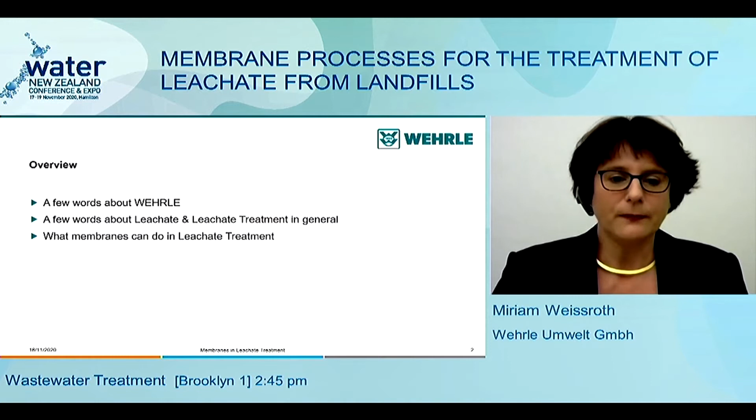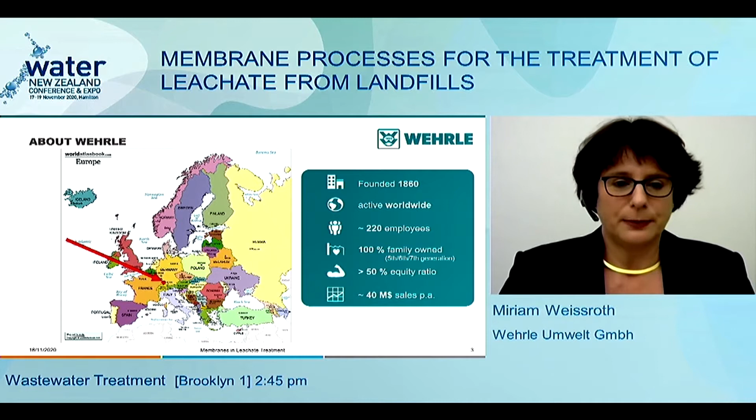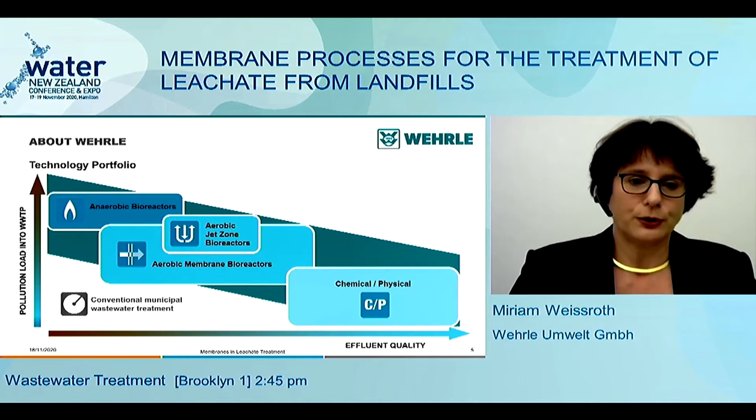WEHRLE is a family-owned company that supplies effluent treatment systems. We are located in the southwest of Germany, very near France, Switzerland, and Austria, and we often work across these countries. We've been around for a very long time and are a pretty small company that has specialized in the treatment of industrial effluents and heavily polluted wastewaters. For our clients, we have a technology portfolio from which we choose and combine different processes to achieve what the client has asked for. We have a good overview of which process technology works where, and we are always on the lookout for new technologies to add to our portfolio.

That's enough about WEHRLE. Now a few words about leachate. Leachate has different origins - you're all aware of leachate coming out of landfills, but there's also leachate from the storage of waste, waste handling, waste transport, and water coming from waste treatment plants is also considered leachate. Consequently, having different origins, we have different compositions, and you see a wide range of COD and TKN values - really heavily polluted stuff that we're talking about.

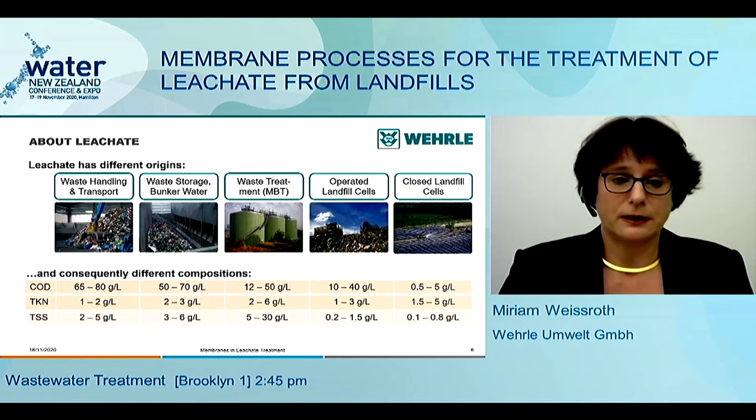But leachate quality doesn't only depend on its origin, it also depends on the type of waste in the landfill - what you and I throw away that ends up on a landfill. It also depends on the waste management strategies a region, country, or continent has: do we deposit fresh waste or pre-treated waste, do we separate it before landfilling? There are many more factors influencing leachate quality, such as seasonal changes - is it hot and dry, do we have a lot of rain - and aging processes in the landfill itself. So we have many factors influencing leachate quality, and they superimpose each other.

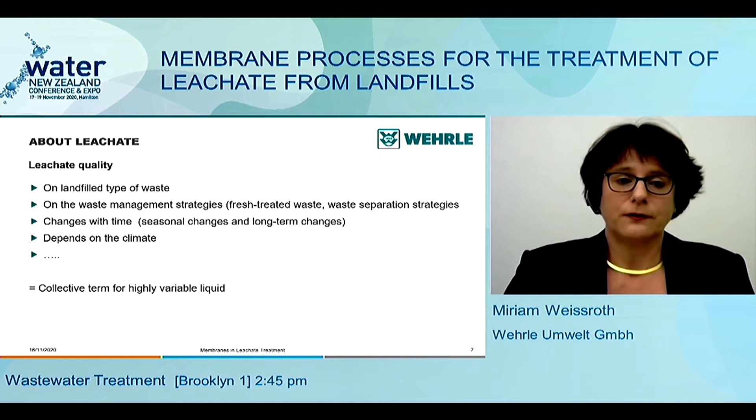So you could rather say that leachate is a collective term for a variety of highly variable liquids. Now, when we talk about leachate treatment, we of course have to look at the treatment targets, and they vary from site to site. But I would like to point out that looking back, we see a great evolution in treatment targets.

It all started in the 70s, when they only looked at COD and ammonia, measured in grams or milligrams. Then people became aware that there is a lot of harmful stuff coming out of a landfill, and more parameters were monitored, such as heavy metals, AOX, or polycyclic aromatic hydrocarbons. Today we are looking at PFAS and BPA, and we have reached a level where we measure substances in micrograms per liter or nanograms.

And of course, that has an impact on the processes that we need to treat the leachates. I would like to point out that today we also look at salt removal. That is something that was not looked at in former times, so it's fairly recent that we find salt removal requisitions.

But when we look at leachate treatment, we have to look at the local conditions. What do we find at the site, and what budget do we have? Is chemical supply sufficient, power supply sufficient? Do we have personnel, etc.?

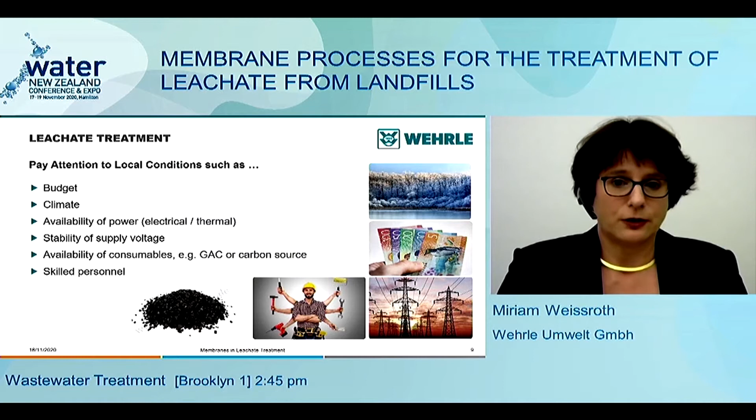And last but not least, we have to consider what's the hydraulic volume that needs to be treated. It ranges from very tiny to very large, and naturally you wouldn't like to treat 5,000 cubes per day using evaporation. I presume, at least, you wouldn't like to.

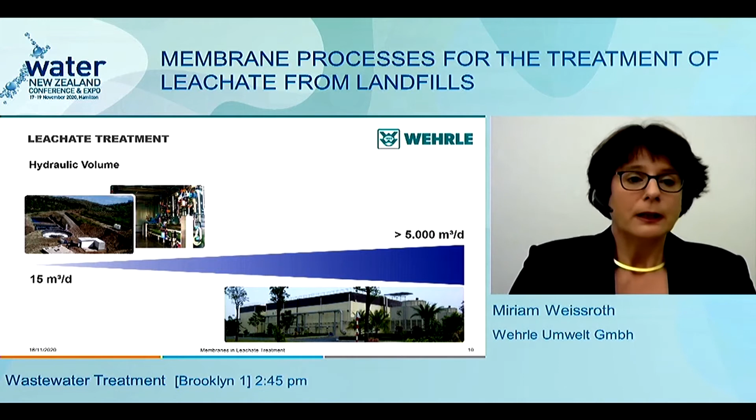So now looking at the treatment processes, SWANA, the Solid Waste Association of North America, has written a wonderful report, and in that they list 28 processes for leachate treatment, and among them membrane bioreactors and reverse osmosis. So 2 out of 28 are membrane processes.

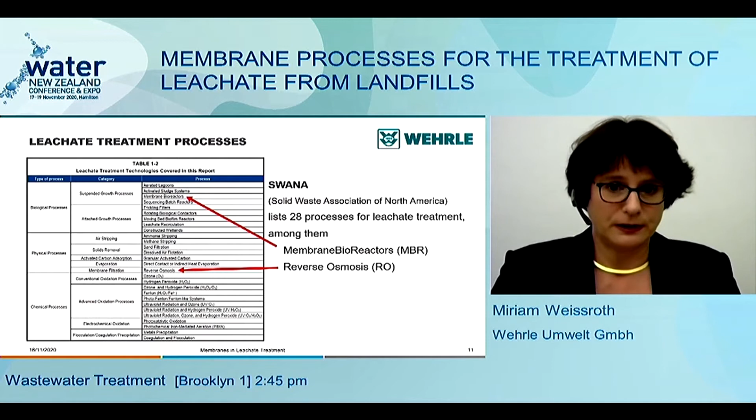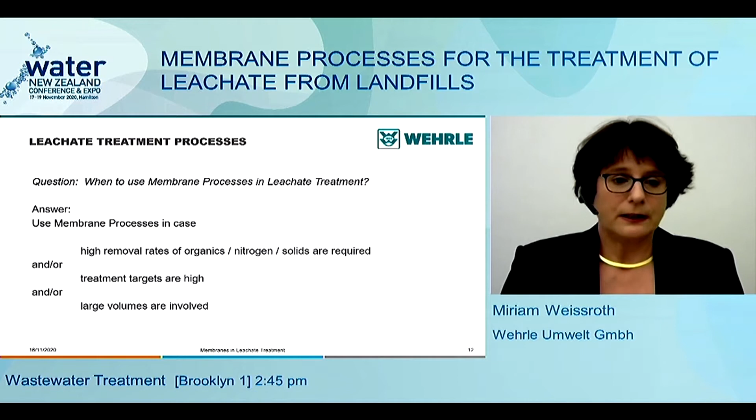So the question would be, when would I use a membrane process and when would I use one of the others? My answer is, if you target a high removal of organics, nitrogen, and solids, you should go for a membrane process. And if you target high treatment levels and large volumes are involved.

Now, just as a reminder for those who perhaps do not work with membranes every day, we differentiate between two main types of membranes. We have the porous ones that we use to retain solids, that's microfiltration and ultrafiltration. And we have the non-porous ones, nanofiltration and reverse osmosis, which help us retain dissolved compounds.

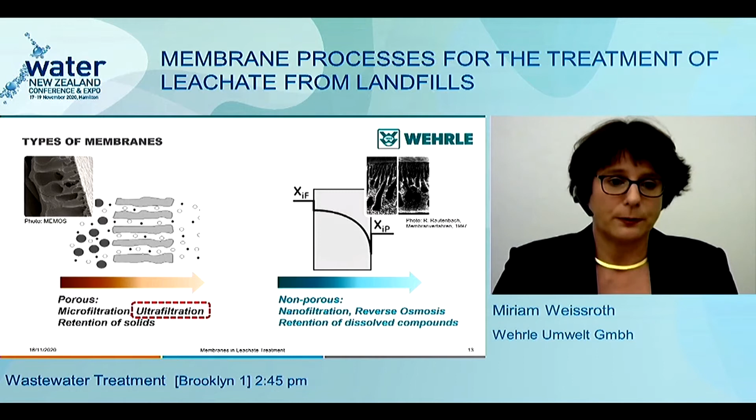I'd like to start with the ultrafiltration. Now, looking at leachate treatment, what do I do with the ultrafiltration? I would combine it with a biology to form a membrane bioreactor.

And I've seen in the program that there are several presentations about membrane bioreactors, so I feel I don't have to really say a lot about them.

What you get is a very compact system. You can see that on the picture on the right. You have the very compact bioreactors in the back, and you have the ultrafiltration in the front.

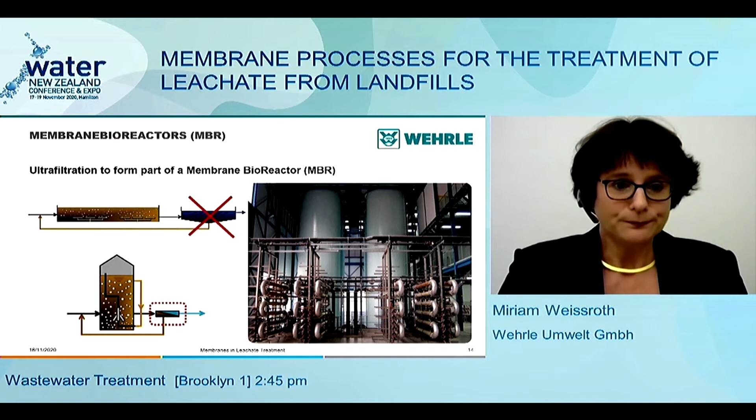But what difference does it make to use an ultrafiltration? Of course, we retain all the biomass, meaning we have a far higher MLSS inside the reactor than we would normally have. We get easily up to 15-20 grams per liter, and that means the reactors become very compact. We can control the sludge age and keep it well above 20 days, and that, together with the compact bioreactors, which maintain a temperature between 30 and 35 degrees, gives us maximal COD removal and a stable, complete nitrification.

And another asset of the ultrafiltration is that when we have to target secondary treatments, we have the advantage that there are no solids in the effluent.

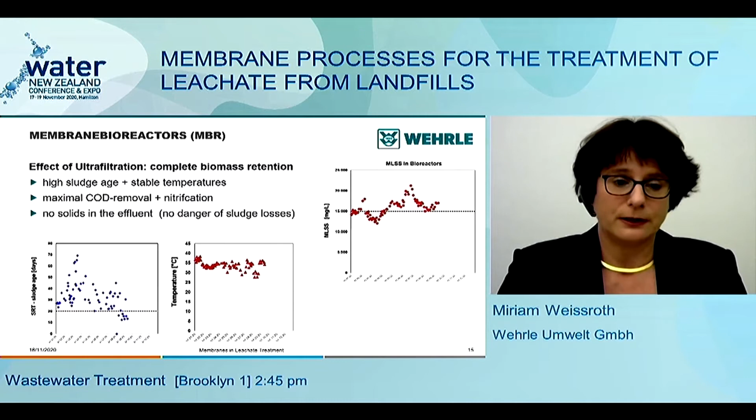Okay, but what precisely does it do for us in leachate treatment? A membrane bioreactor removes all the organics that can be removed. It removes around 90–95% of the nitrogen. It retains all the solids, but it doesn't do much on the salt side, and it doesn't do very much on the trace organic compounds, or let's say the harmful substances. What leaves the MBR is the recalcitrant COD, salts, and TROC.

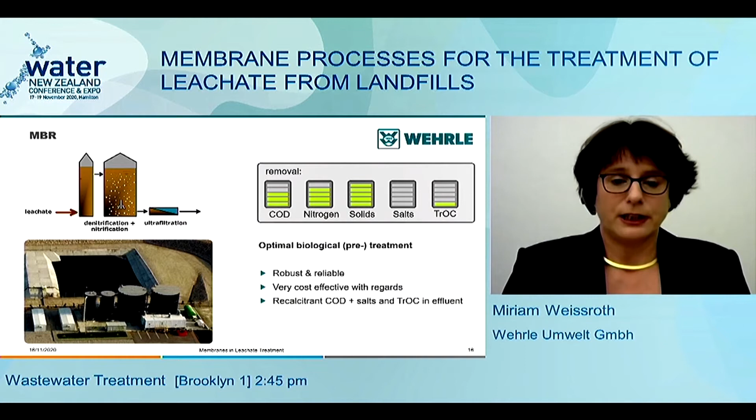But what do you do if it's not enough? If you just want to remove some of the recalcitrant COD, you might want to use activated carbon if you have it, because that is a thing that's not available in all countries. And it also takes out your COD or reduces your COD, though it doesn't do very much on the other parameters.

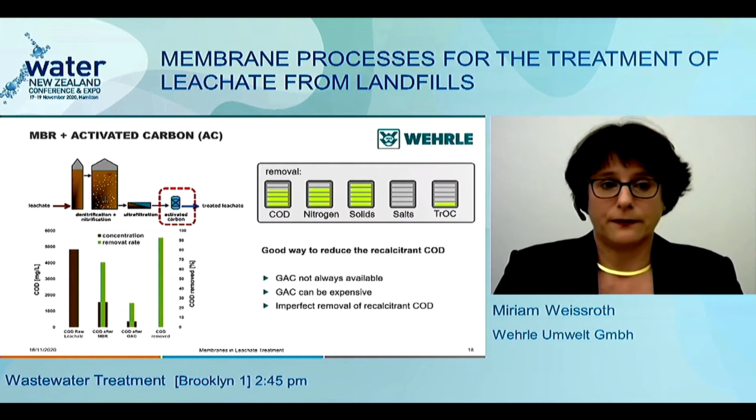So most likely it's not enough these days in terms of leachate treatment, and you would want to look at something else. One option could be nanofiltration, and I'd like to dwell a bit longer on it because it's not so well known to most people. It's the small brother of reverse osmosis, with pretty much the same setup, but different membrane characteristics that make it very interesting for us.

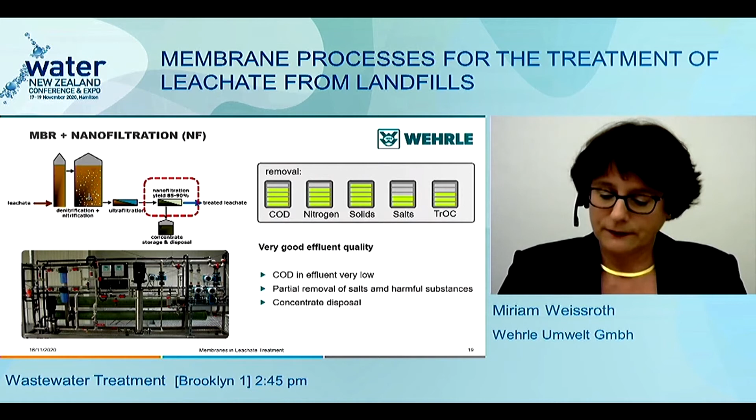It removes a good part of the COD. It doesn't do much on the nitrogen side. It removes part of the salts, mostly the multivalent ions, and some harmful substances. But it leaves us with a concentrate, because after all it's a membrane process, and all of them just divide into clean and dirty. So we have a concentrate, but because the yield is pretty high, 85 to 90%, that only leaves us with a small concentrate volume. I'd like to show you some results from a nanofiltration trial.

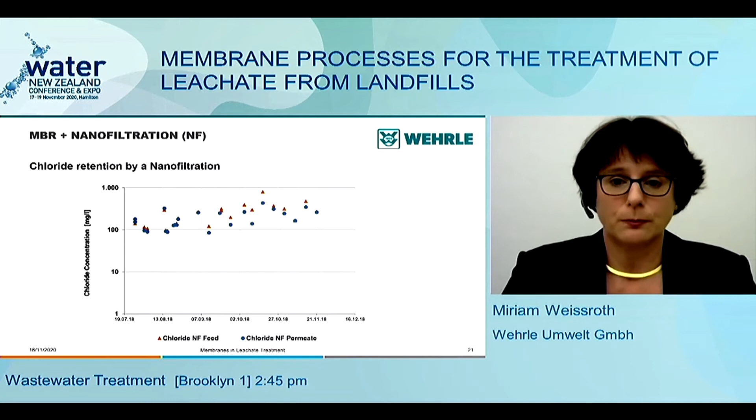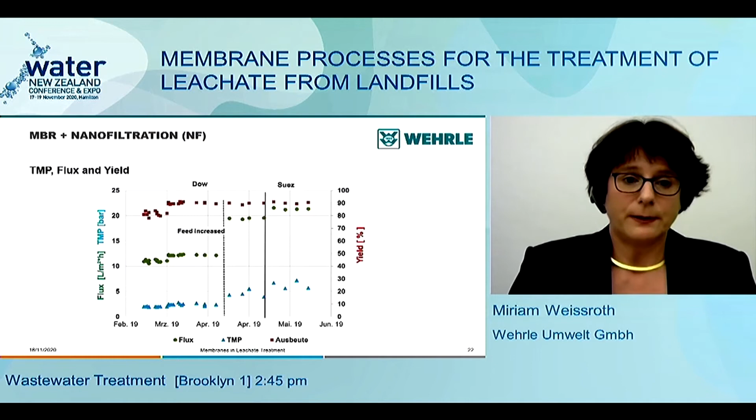We can reach yields of about 90%. Those are the red squares on the top line, on the right axis. So this is a very promising approach, I think, to leachate treatment.

But still we do have the concentrates. And we propose, if possible, to combine that now with activated carbon to get rid of the concentrates. So this means we take the nanofiltration concentrate, lead it via activated carbon, and return it into the biology, and have nothing left then.

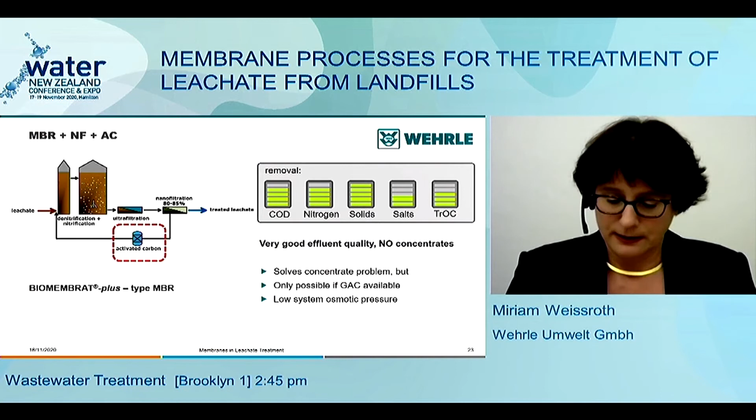That gives us pretty much the same treated leachate qualities that we have with a pure nanofiltration, but it removes the problem of concentrate treatment. The only real drawback is that you need granular activated carbon, and that is not to be had in all countries. I'd like to share some results from these BIOMEMBRAT-plus systems, these closed loop systems, with you.

When we look at well-known or conventional parameters such as chromium for heavy metals, or AOX, or fish embryo toxicity, we see that the NF permeate, with regards to the leachate feed concentrations and the target concentrations we want to reach, is very good, so we can safely meet our treatment targets for all these parameters. So nanofiltration in combination with membrane bioreactor and activated carbon does a great job.

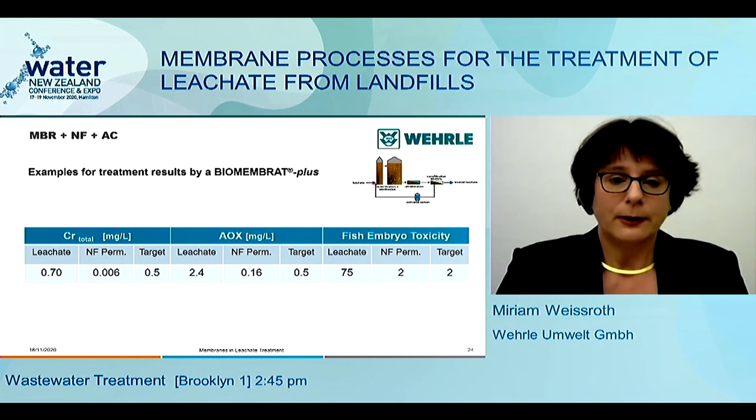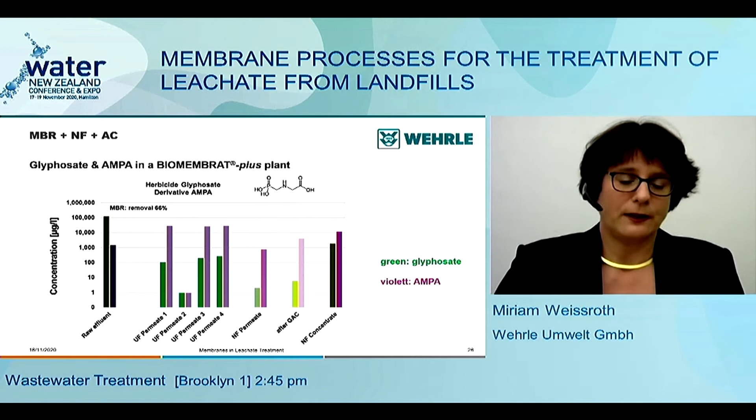When we look at the AMPA concentrations, we see it's around 30,000 micrograms per liter. So we feed in 100,000 of glyphosate and we have 30,000 of AMPA, which means we have removed about two-thirds of it by the biology. The nanofiltration does a quite good job retaining both glyphosate and AMPA, but we can see that AMPA does not adsorb so very well to activated carbon. So we have quite different behaviors here.

Another example is PFAS in a BIOMEMBRAT-plus plant.

We are just starting to look at PFAS over here in Germany. We've been watching it for a long time, but we have not really started to tackle it - not we as WEHRLE, but we as a country, so to say - but that is changing now. We have an official trial for a municipality going on at present. It's still continuing, so I don't have the final results yet, but I want to share these preliminary results with you.

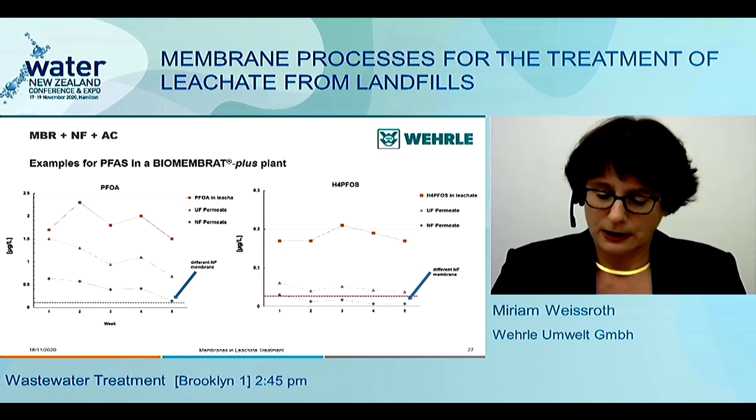Just wanting to say that this combination is very promising, but it's not a panacea. It can't achieve everything. If you need even higher treatment results, you must go to reverse osmosis.

We all know we can feed leachate directly to reverse osmosis. You get excellent results, no question. The only thing you have to watch is the ammonia, because on leachate we have these very high feed concentrations and we have a comparatively high slip of ammonia over a membrane. So we might easily find 10, 20, 30 milligrams of ammonia in an RO treated leachate.

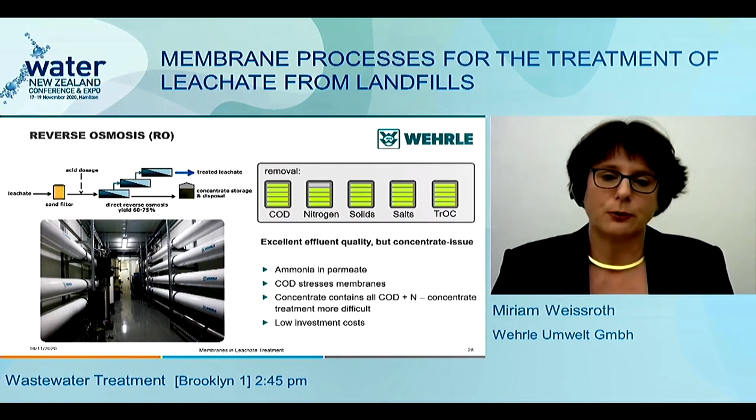The missing removal of the organics puts a stress on the membranes and reduces the overall effectivity, so the yield is not so very high, let's say 60, 70%. That leaves us with about 30% concentrate, meaning a third of our leachate ends up as concentrate. This concentrate is really, really dirty, which makes concentrate treatment, for example in an evaporator, more difficult. But it's not so very expensive.

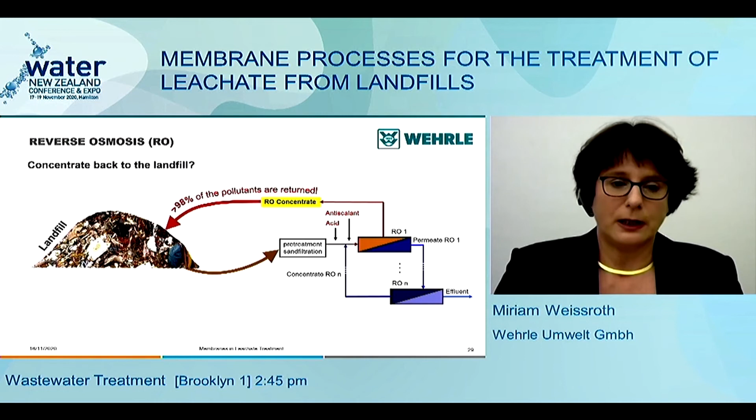Now, most people ask themselves, what do I do with a concentrate? In many countries, the usual way of dealing with it is we just bring it back to the landfill. The only problem is I see it all again over and over. It starts to accumulate - every molecule I check out with a lot of pain and effort, I see again, and I see its brothers. So it doesn't really help me in the long run.

So if you ask me, I think the best option to deal with leachate and get the highest quality is to combine the biology and the reverse osmosis, because that gives you the best results. You get a fairly small concentrate amount, and that concentrate does not contain any ammonia any longer and has lost the fouling potential of the COD - no volatile compounds there any longer, so it doesn't smell.

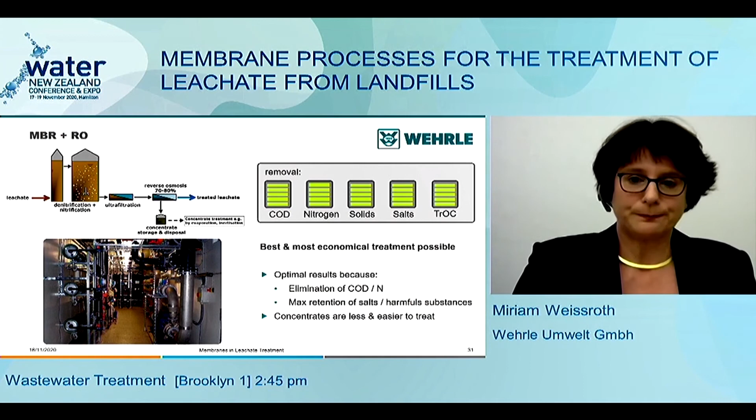You can easily, or comparatively easily, treat it with an evaporator, and the condensate can be mixed in with the treated leachate. Whereas when you have a reverse osmosis without biology, the condensate is very dirty stuff because it contains all the ammonia and a lot of the volatile compounds. So this would be the recommendation.

Now, the question of when to use membrane processes, I think, has been answered, or I hope it has been answered. Now, you might be asking the question, but when not to use membrane processes. And of course, I would say when you have low or lower treatment targets, you don't have to, and you don't want to go to membrane processes. If an MBBR does the job, it does the job, and that's it.

If you have a small hydraulic volume of, let's say, 50 cubic meters or less, you probably would not look for a membrane bioreactor because it gets comparatively expensive. But you might be looking for a reverse osmosis only. And if you have a low budget, then again, you don't want to go for a membrane bioreactor or its combinations, but perhaps you might consider a reverse osmosis only.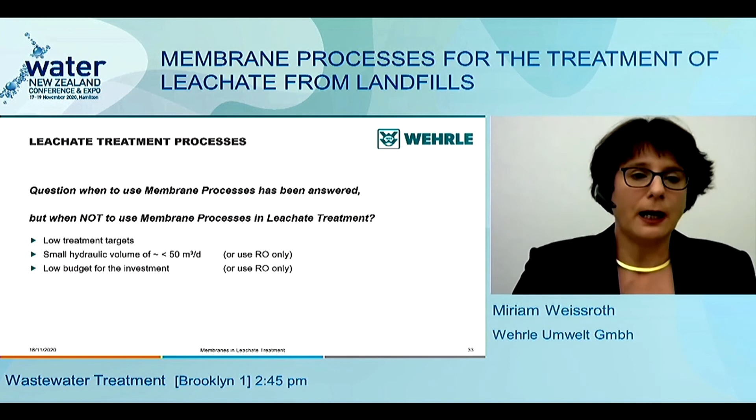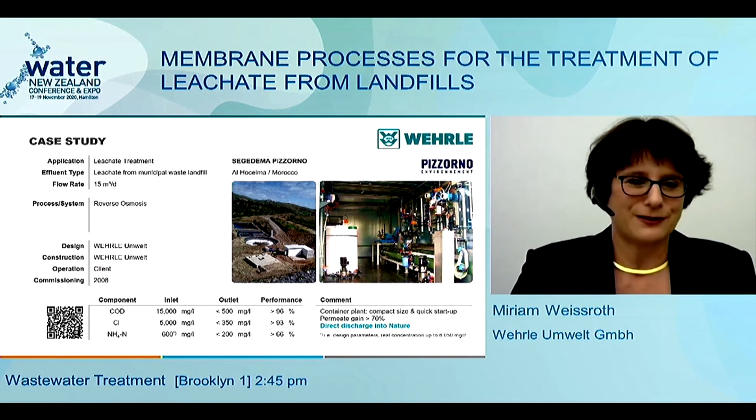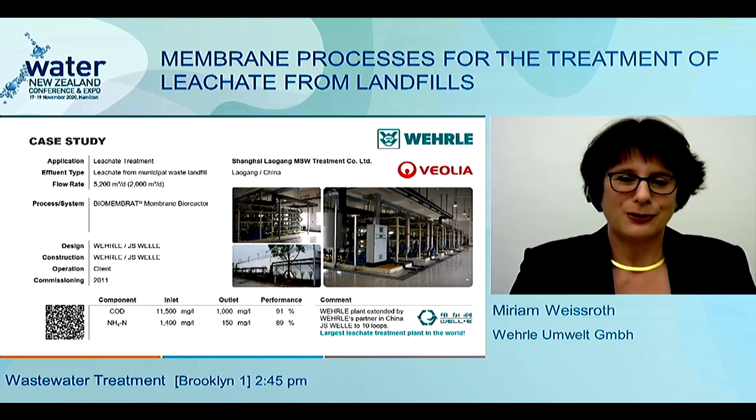This is a very large installation for 5,200 cubes per day. What you can see in the pictures is that you can just multiply the ultrafiltration, so you can upscale membrane bioreactors very easily, and really use them to treat immense or large volumes when it comes to difficult wastewater. For a normal municipal wastewater treatment plant, that is, of course, a small volume, I know that.

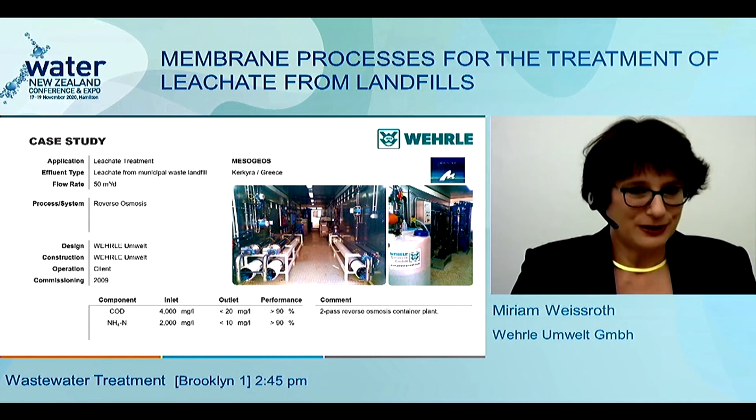In the middle, you find clients who prefer the reverse osmosis, like this one, or you would have clients that go for a membrane bioreactor because they say, I'd do anything to avoid the concentrate. So there is a range in the middle where the client just has to decide for himself what's best for him.

I have to put the mic on. Here, thank you very much, Miriam. What I heard, you are in Germany at the moment, is that correct? Yes, can you hear me now? Yeah, we can hear you. It's 3:15 in the morning in Germany at the moment, only to let you know that. It's my best time of the day, so to say. Not quite, yes, but well done with this presentation, everybody.